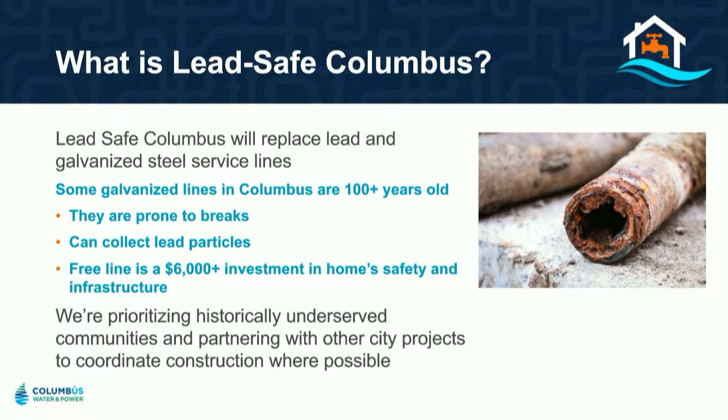Ultimately, we're prioritizing historically underserved communities, again, communities with lots of lead service lines. We're trying to be efficient about this. We're trying to make sure that we get them all out systematically. Our goal is to do it before 2037.

So what is a water service line? I think a lot of people know what a water service line is. A lot of people don't realize that it's divided in ownership typically in two parts. You've got a part here that gets to the water main to the curb stop, and you'll see a little circle sometimes in the tree lawn, sometimes in the sidewalk. That is owned by us as the public utility. From the curb stop into your home, that is owned by you. That is your private service line.

Because of this, they can be made of different materials. We may have replaced our side, you may have replaced your side, so we have to identify the materials of both sides. So you may see some cards tonight asking for you to go home and identify your service line material. You would be looking at your private side. We also will be asking to get work agreements signed, because that's your private service line and we need an agreement in order to replace it for you.

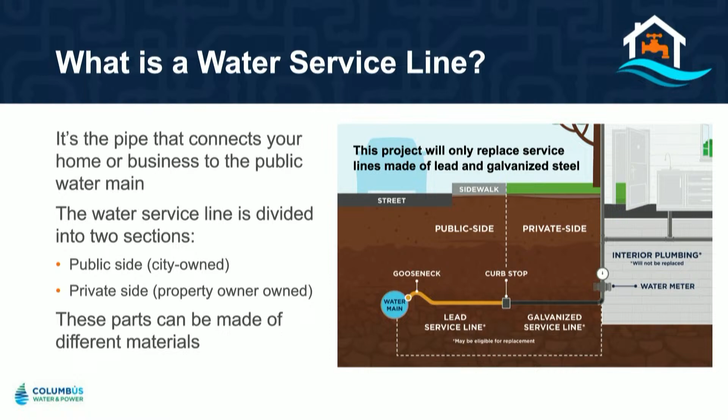Ultimately, like I said, we're replacing them now not because it's a health concern, but because there's new regulations in place. And actually, this is something we wanted to do for a long time. We have a new federal regulation. All service lines have to be removed by 2037. We know we can hit that deadline, so we're working hard and fast to make sure that it happens.

We're being proactive. The galvanized piece, it's aging infrastructure. It's time for it to go. It helps preserve water loss and helps prevent us from losing water. It also helps, like I said, improve your infrastructure of your home as well, to make sure that you're not going to have a line that might fail on you soon. All right.

Hello, my name is Hannah. I'm also with the city, and I am going to share some more information about how this construction is going to be impacting you and your property and the Hilltop community.

We are expecting to replace around 50 to 60,000 water service lines as part of this project. That's a lot, so how are we going to do that? First, we are going to tack on to planned city construction. If we are digging up a hole and exposing the water service line, we want to take care of that lead and galvanized steel right then and there. That's where the majority of the work happening right now will be, on this planned city construction.

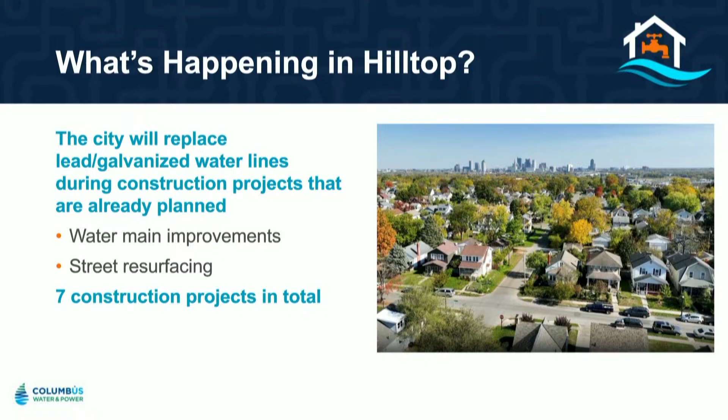Some of you, a few of you, are part of our first proactive replacement program. So if you're in North Hilltop, around Eldon, North Terrace, you are in an area where we are only replacing the water service lines. We used community feedback to help us determine where to go, and Hilltop is one of the first places that we decided we need to go.

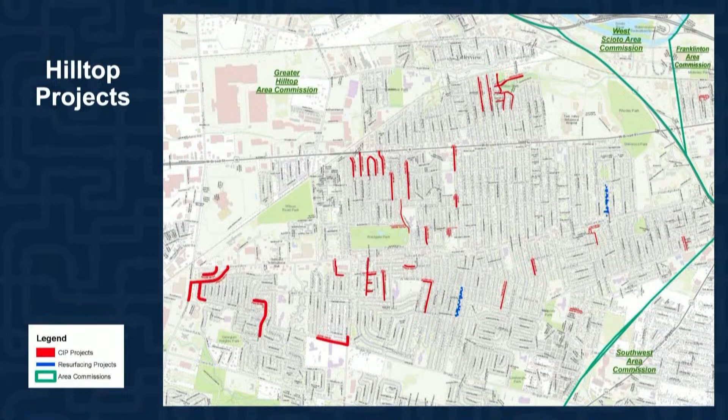We have maps online available, and also at the tables. If you can see these red and blue squiggly little lines, this is kind of where we will be, again, during planned city construction. We do have one project in Franklinton.

So how is this going to affect you? The first thing we all want to know is, what is this going to cost, right? What is this going to cost for you, the homeowner? It's free.

Most of us are not used to hearing the government say the F word, right? Free. The government doesn't say free enough. So what is the disclaimer? What is the fine print? The fine print is that it is free as part of the planned city construction that I mentioned. So when our team, our construction crew is on your street ready to replace that water main or whatever it may be, that is when there is no cost to you, the homeowner, okay?

So again, what does that mean? What does free mean? Are you going to put $6,000 on my water bill? No. Our water bills are not meant for that. We're not tacking that cost of replacement onto your water bill. We're not putting a lien on your property or on your mortgage. We are not recouping that money in that way.

The water bills that you pay today, that you've always paid, they pay for this work. Water rates, the existing water rates, help us do everything that we're doing. They help us treat the water. They help us do this sort of replacement. They help us upgrade that water main in your street. So that's all the caveat. It's free when we are on your street.

Now, the water service line has been and will continue to be the financial responsibility of the homeowner, okay? So if anyone goes home tonight to a broken water service line, my fingers and toes are crossed. Now, that doesn't happen to anyone here. But if your line breaks before we get to you, that is your responsibility as the property owner, okay?

Touching on water rates really quickly, most people do not know that we have a discount program. We have representatives from that program here tabling tonight. We have a 25% discount on your water bill. It's income qualifying. If you have something like SNAP, you may qualify for that. And if you are one of our seasoned friends, over 60 - my mom is not a senior, she's seasoned, okay - there is an extra discount. So I highly recommend that if you feel you could take advantage of that, go talk to one of our team members tonight.

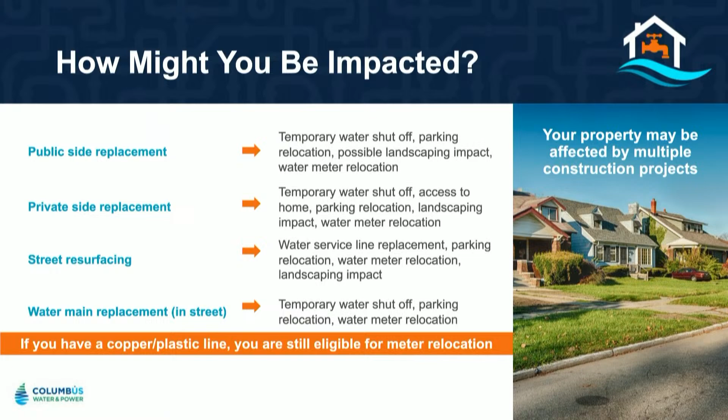The least of which could be you may have to move your car for a little bit, but most of us are going to have temporary water shut off with advance notice. Again, parking relocation, there's going to be some sort of impact to your landscaping. Everyone, regardless of what material your water line is made of, has the option to move your water meter from inside to outside. So whether you have copper, plastic, or galvanized steel that's eligible for free replacement, you are likely going to be impacted in some way, shape, or form.

So I mentioned water meters. Here in the Hilltop, you've probably heard about water meters. The city is doing a lot of work on water meters right now. As part of that work, we've gotten a lot of feedback from the community. We've heard and seen from a lot of you, and as a result of that feedback, the solution we've come up with to the disturbance we cause by coming into your home to access that water meter is to move that water meter outside.

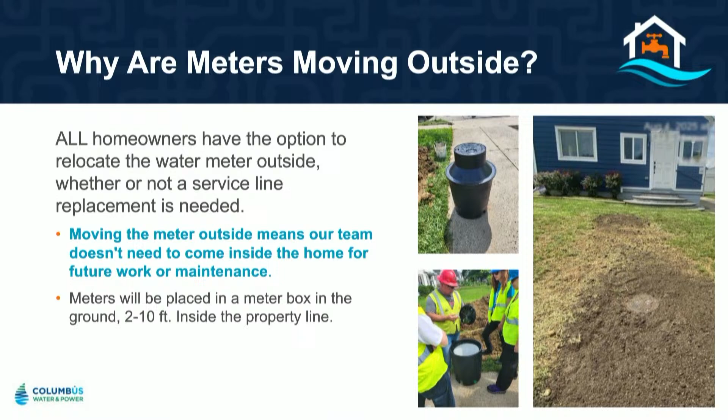That's an optional program, as of right now, that you can take advantage of during this planned city construction. Hopefully everyone can see these pictures. This will show the water meter moved outside. The water meter will remain on private property, so it would be moved outside in a weatherproof box in the front yard. That's an optional program as of right now.

So how do you know if you're getting a replacement? First and foremost, come talk to one of us in a blue t-shirt. Aside from pizza, that's the reason we're here tonight, to have FaceTime with the city and have these conversations. Believe it or not, these conversations we have tonight do help us shape the program and change how we're doing this work.

You can also use your phone's camera to scan the QR code on screen. It's also available at your table. There's a lot of QR codes, but this one will take you to a map where you can input your address and search your property. That map will tell you if you're in a project area, what that project is according to city records, and what your water service line material may be made of.

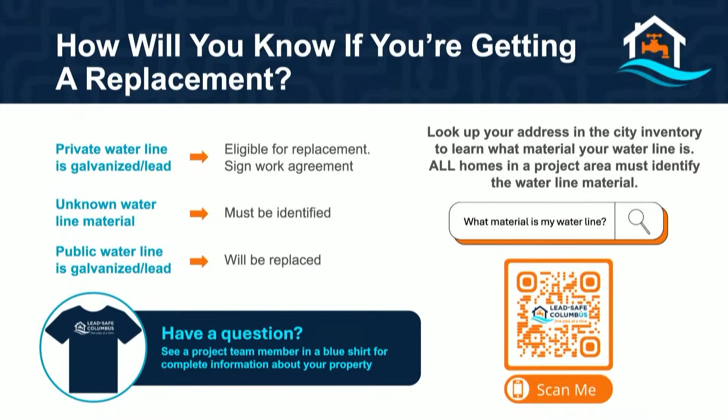What we need from everyone here tonight is to tell us what your water service line material is made of. So that's another QR code at your table. Hopefully everyone grabbed a bag when they came in—if not, please see the table up front. We also have information in the bag about how to take that survey. You take a quick picture near your water meter and share that with us online, or if it's easiest, you can email it to us.

Our team that is going out knocking on your doors—many of you may have already seen our team—they can assist you with that when they're at your door.

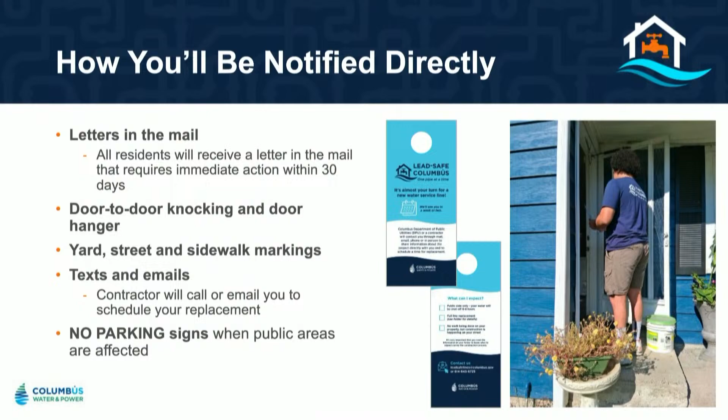All right, I've been talking a lot, so I'm going to talk through this a little faster. How are you going to be notified of all this work? Tonight is not going to be the last time you hear from us. Many of you have probably already gotten a text, an email, or maybe a door tag from us, and that's going to continue as we get closer to work. You're going to keep getting texts, emails, and mail based on your water service line material. If you haven't shared that picture with us, you're going to hear from us quite a bit.

What are some basic expectations from this work? Our contractors, if we're replacing your water service line or if you've chosen to have your water meter relocated outside, do need to come inside the home to access that water meter. If you're relocating the water meter, that'll be the last time we have to do that, hopefully for a while. Everything is going to be replaced with copper—whether it's on your side or our side, we are replacing lead and galvanized steel with copper.

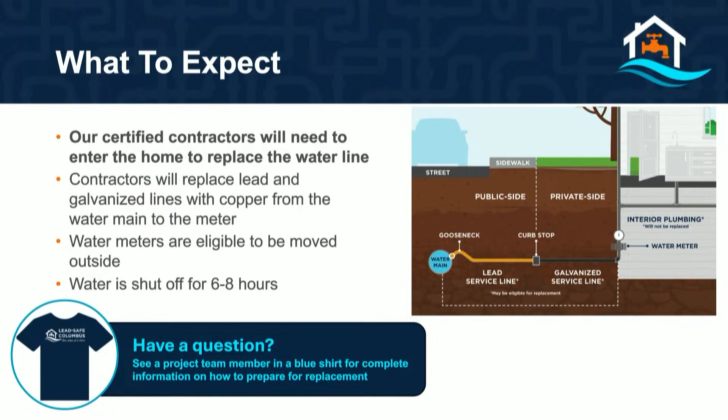Right now, it is optional to move your water meter outside. If you're interested, you'll still need to sign a work agreement authorizing the city to do that work. You can expect a water shutoff for about 6 to 8 hours, with advance notice given to you. After this, you can come up to anyone in a blue shirt to ask more questions.

So, coming into the home. I want to touch on this a little bit because that's kind of uncomfortable, right? To have a strange person come into your home. My boyfriend doesn't let me be home alone when there's a stranger coming in the home. It can be a little uncomfortable. So first and foremost, we see you and we hear you.

Water meter relocation outside is the solution we've identified for that right now. So in this picture, this is the only thing our team is looking for when we come inside the home. Who you are and whatever eccentric hobbies you have going on at home are not a concern for us. Some of you are smiling, I'm a little suspicious. That is not what we are looking for. We have a singular job to do.

First and foremost, it'll primarily be our contractors coming inside the home, but they have a singular purpose. They want to do their work as accurately, efficiently, and as safely as possible and get out, because they're uncomfortable too coming inside your home. They don't know you, they don't know what you have going on.

So what I'm promising you is that this is what we're looking for when we come into your home. And what I'm asking from you is to make sure that when our team goes inside, you make that a safe environment for them. They need at least 3 feet by 3 feet of space around the water meter, and they need a clear and safe path to the water meter, usually in the basement.

If you can't access your water meter—we had a woman reach out to us last week and warn us, hey, I have a couch in front of the water meter, the lights are out down there, honestly it's kind of creepy. That's great, let us know. Call us, email us, and give us a warning about what we're walking into. We can help you move that couch, but let us know.

All right, how can you prepare for replacement? I believe in your bags there is a full handout of all the ways that you can prepare for replacement. Again, if you didn't get a bag, come up and see us. Anyone in blue can help you out.

First and foremost, our contractors are going to be the ones reaching out to the property owner directly to schedule your specific replacement. If you're a landlord and you want us to work with your tenant instead, just let us know. But it'll be our contractor reaching out to you to schedule your water service line replacement.

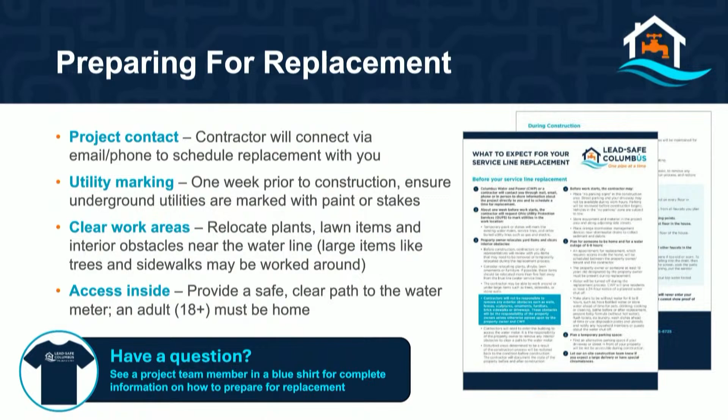Utilities are going to be marked in the yard and in the right-of-way. Again, please clear a work area around the water meter, and someone at least 18 years old needs to be home if we have to come inside.

We are very lucky tonight to have one of the brains here, one of our engineers, who designed this work. So I'm going to pass it over to Evan.

Just the green button? Yep. Hey everybody, my name is Evan DeSanto. I'm one of our project engineers, which also implies I'm not a public speaker—that's what these people are here for. I'm an engineer, I like to sit in my office and not talk to anybody, so bear with me as we get through this.

It probably takes about a month when we're on your street from start to finish, but it does depend on the length that we're installing. Some good contractors will get 200 to 300 feet a day, just to give you an idea of what to expect when you're out there.

During the main replacement, the public side lead and galvanized pipes will be replaced. Private side replacements will begin after the water main is completed. And depending on the work agreements that are signed, the water meter may be relocated outside during the replacement.

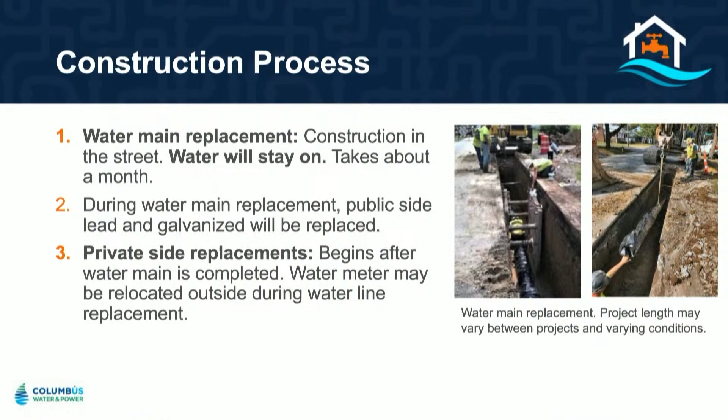Hannah showed this diagram before, but construction for a service line replacement is fairly easy. A lot of times what they're doing is going into your basement, putting a cable inside your existing service line, and pulling that line right through from your basement out to that hole out there. If all goes well, sometimes they're done in 2 to 3 hours. It's not really invasive, and that happens most of the time. They're successfully able to do that.

If we can't do that, then sometimes we actually do have to dig a trench, where there's a little bit more damage to your yard, but they will replace it. So that's kind of an overview.

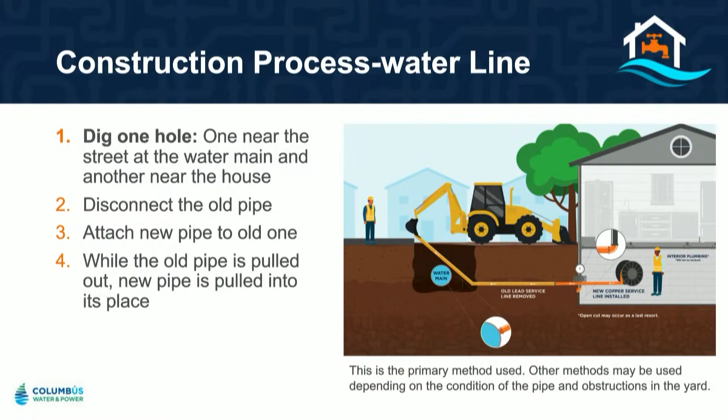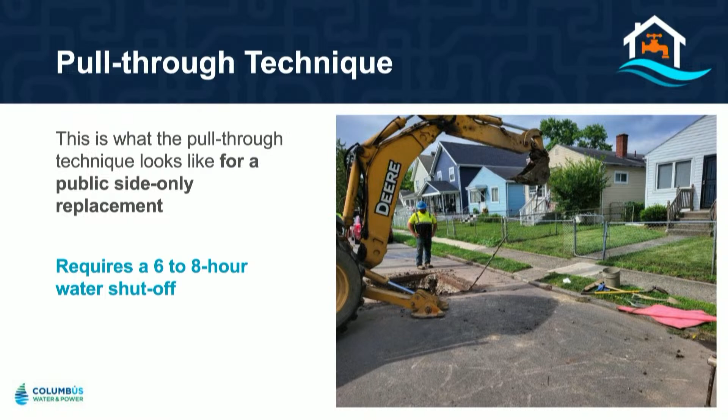This next picture kind of shows that in live action. You can see the backhoe is connected to the service line, and they're pulling that right through that hole. So we say 6 to 8 hours for a shutoff, but like I said, on a good occasion, it could be 2 to 3 hours. We like to give you a worst case scenario first, that way you're not expecting miracles to happen. But that's probably a good indication of what you're going to see out in the field.

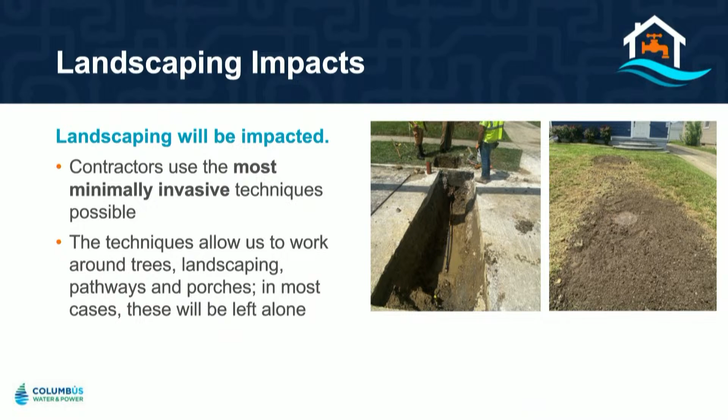So when we're out of your yard, you're going to see topsoil, you're going to see seed. We have 2 projects going on currently where we've had customers raving about our contractors, saying they've done a terrific job on restoration. We plan to keep that up with future projects. That's the city way. So if you ever have questions or complaints with restoration, please let us know. We will have our contractors jump on that immediately for you. Like I said, avoiding trees, pathways, porches, we're going to do everything in our power.

Lastly, there is going to be minor inconveniences. It is construction, so you could expect some road closures. We do our best to keep you notified in the process. We'll send out a resident notification letter at the beginning, which will have contact information for a project manager like myself. We have full-time inspection on our projects, so they will also have that contact info, as well as the contractor. Again, call us anytime.

We're here to help. Crews may need access to driveways. You are always going to be able to get into your driveway. When we're right in front of it, we might have to put down some plywood or take a couple minutes to move, so bear with us, but you'll never not have access to your driveway at any time.

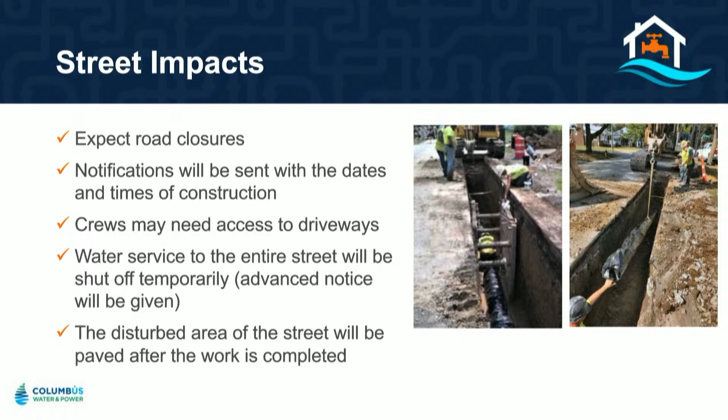Water service to the entire street will be shut off temporarily when we have to tie these water mains in, on each end of the street. We will do shuts, and those are normally only about 4 hours, and it's during the day when most people are working, say like 9 to 1, so those are pretty short.

After the work is done, we do plan on paving the street, so the half that we have put that water main on, we will be paving. On some projects, we will be doing full width, depending on the scope of the project, but for a normal water line replacement, much to everybody's dismay, we're not doing the other side of the street too, we're only doing the side that we install the main on.

Thank you, Evan. All right, I want to talk a little bit about what happens after construction. This is where the next part of the lead program comes in. You're going to receive instructions for flushing when the project is over and your service line is replaced.

As I said previously, we do not have detectable levels of lead in our water. However, when a line is replaced, you can kick up particulate, and you can see temporary increases in lead. The way you get rid of that is you flush it down the drain.

So you'll have instructions on how to properly flush your home. You'll run your water through every spigot. It'll be systematic, and it'll be included in a kit that you will receive for how to flush your home. Proper flushing is highly effective, but just to be on the safe side, we're also going to provide you with a pitcher filter that you can use for the next 6 months. We recommend that you use that pitcher filter for cooking, drinking, things of that nature. You should be perfectly fine after that.

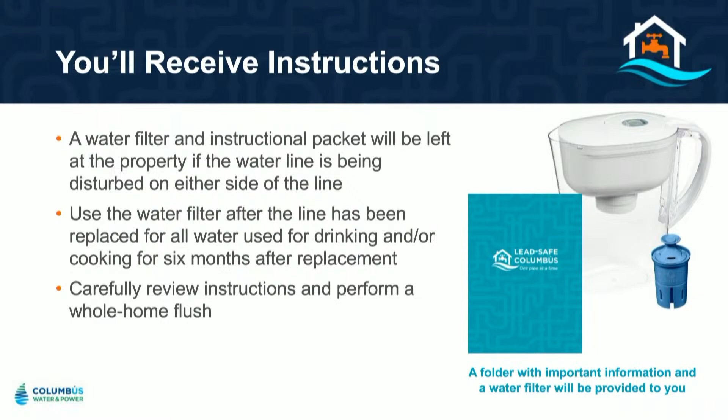The main takeaway from this is those instructions: flush, use your pitcher filter, and then reach out to us if you want to sample. When we talk about flushing, I think a lot of people wonder what we mean. When I think of flushing, I think about flushing a toilet. When we say flushing, we mean running water at a high velocity through your whole home.

We want to make sure that any construction particulate that happened when we cut those lines and installed new lines is flushed out. You're going to be asked to remove aerators on your home. The aerator is the little screen on your faucet.

There are certain appliances, like your washing machine or refrigerator, where if you can't remove a filter and it's not something you can properly flush, just don't run it while you flush. Flush everything out through something of high velocity. We highly recommend you use your bathtubs - that's a really nice way to pull a lot of water fast and get maximum velocity through your house. It's extremely effective at removing any construction debris.

Use that filter kit, and contact us for sampling. We can verify for you with the sampling, and we're happy to do that.

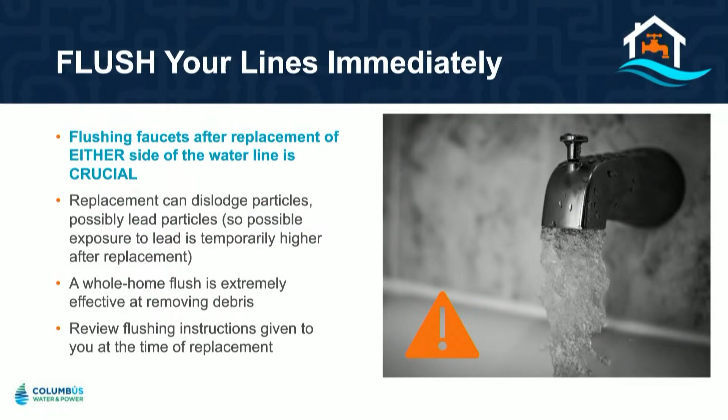In addition to the kit - and the kit may come before the work is done, the main thing is you have to have the kit before we're done - you may see it as we start work on your street. They may go through and drop the kits off. But in addition to that, we're going to do some restoration.

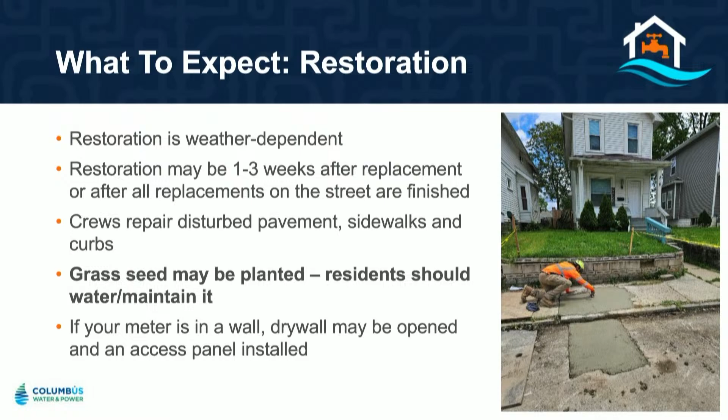Evan talked a little about yards. What we'll see in yards is we try to restore your landscaping as best as possible. We try to make sure that concrete is flush and walkable. However, sometimes it's weather dependent - if it's January, we can't always lay concrete right away, and grass doesn't grow in January either. So we'll do our best to make everything level, lay straw, and you may have to wait for us to come back and finish restoration when the weather is appropriate.

Typically, if the weather is cooperating, it's about 1 to 3 weeks after replacement. They'll go and do the replacements, and then send a restoration contractor to get that restoration done.

The other thing we caution people about is that if you've drywalled in your meter, we have to have access to that. We're going to leave an access panel - we need that 3 foot by 3 foot access there, and we'll leave something nice and clean. We're not trying to damage anything. We want to try to leave it as we found it. We're good Boy Scouts in that way.

So as Hannah mentioned, our big ask tonight is please go identify your private side material. We have relatively good records because we just sent our metering team through the Hilltop, but it's really helpful to have that photo. That photo helps us confirm, helps us plan, and helps us know what kind of work agreement - or if we even need one - from you.

And if you get down into your basement and it is galvanized, please sign a work agreement. It's free, as Hannah said - it's free when we're doing this kind of work down your street. Now is the time. We want to help you, and we want to make this successful, but we really want to do the work for you.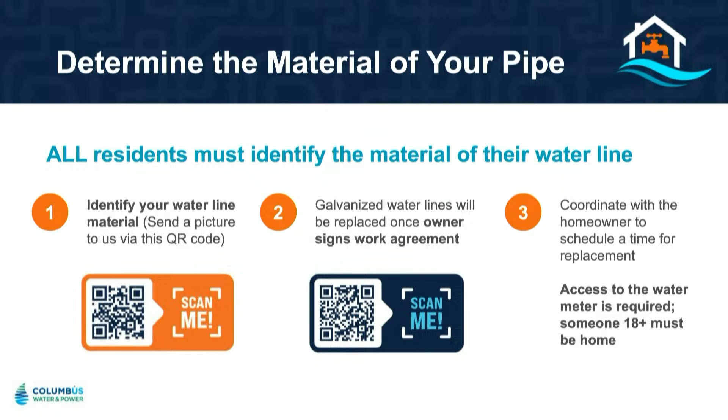So those are kind of the things we'd ask here, and that's what's next. Ultimately, you can see any of us in a blue shirt. If you want to sign a work agreement tonight - let's say you already know, or let's say you don't know and want to find out - come find us. We can tell you what your material is based on our records. We'd still ask you to confirm if you can, and we'll help you find the work agreement application to get it signed.